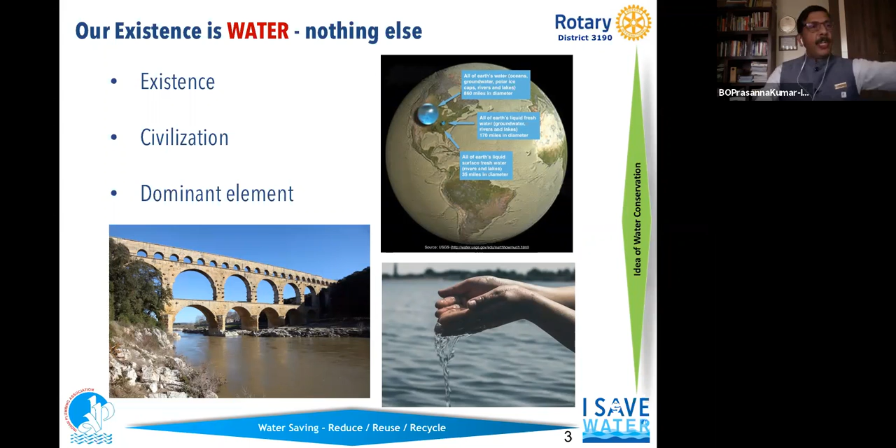This sloka very nicely interprets the purity of water, and we take blessings through water. This means in this water, I invoke the presence of all the divine water from the rivers Ganga, Yamuna, Godavari, Saraswati, Narmada, Sindhu, Kaveri. All these rivers are considered goddesses, and I pray to them to consider me for blessing. This is how we invoke the presence of goddesses through water, proving our existence is only because of water.

So we can say water is everything for us. Thomas Fuller, a great historian, narrated that we never know the worth of water until our well dries. This is the worthiness of water.

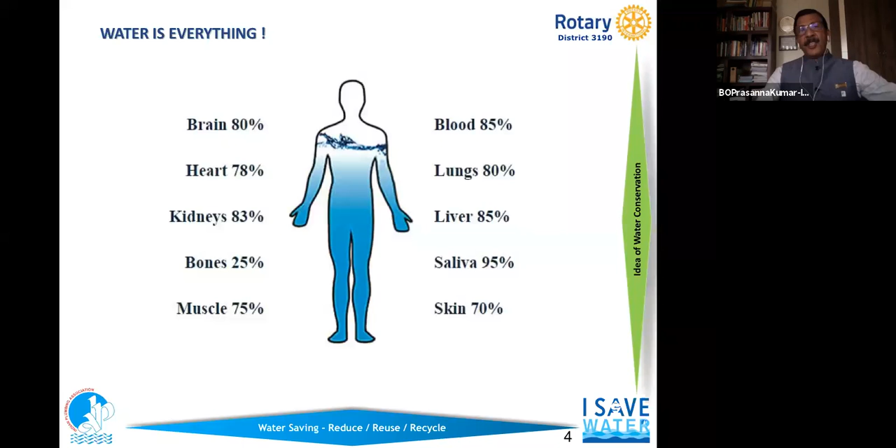If you consider the whole distribution of earth's water, how much of earth has water? As I said, about 70% of the surface of the earth is covered with water, and of that 70%, about 97% is ocean. Except for navigation, it is really of no use for day-to-day human consumption.

3% is the fresh water available on earth, out of which 77% is in the frozen state in our ice caps, and 22% is groundwater. How much of that 22% is left is really a big question mark for us.

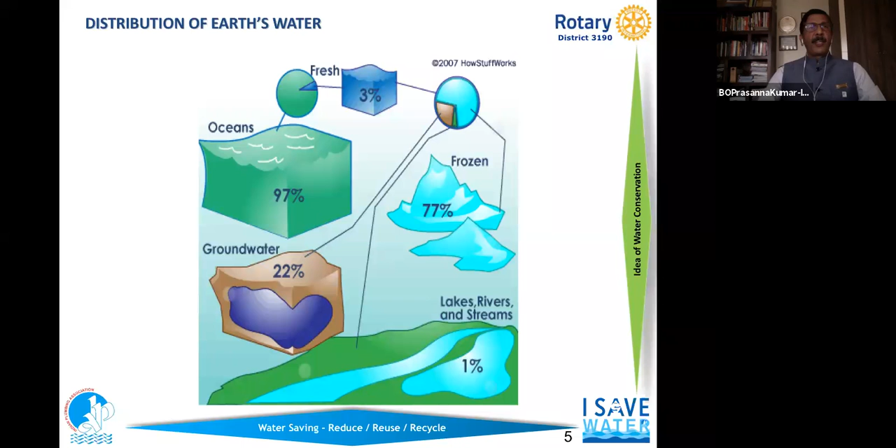Water is also depleting day by day to a very great extent, particularly in the last two decades - there has been a rapid depletion of groundwater. Our usable and replenishable water, in the form of lakes, rivers, and streams, is only to the tune of 1%. So we are all using that 1% of water for our human living.

If you consider that 1%, where are we using it worldwide? If you take the total water utilization worldwide, we use the majority of water for irrigation - that is to the tune of about 70%. Residential use is 10%, termed purely for human habitation.

The rest of the industry uses about 20% of the water. This includes commercial use - hotels, hospitals, commercial buildings, malls, everything - which consists of about 20%.

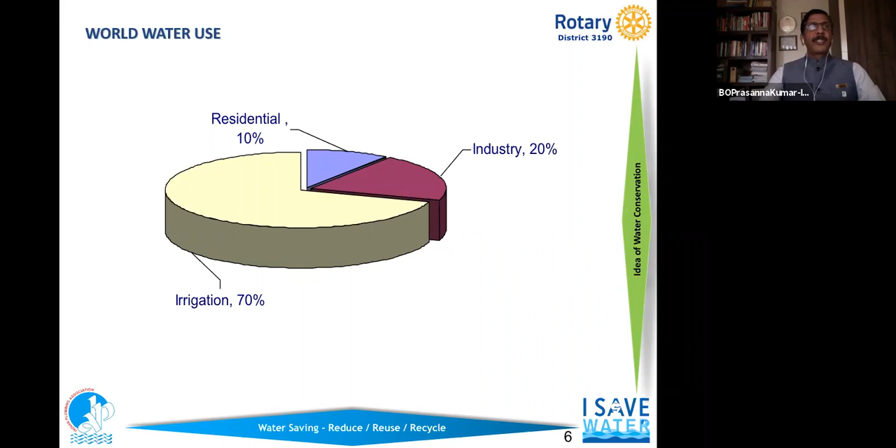So even if we are using only 10% for residential purposes, we are facing utmost scarcity of water in many, many cities now. If you further divide total water usage for residential purposes, for bathing and wash basin alone, about 55 to 60 liters of water is being used.

This is bathing with bucket water, shower or bathtub - on a national average, this is the amount of water being used. On toilet flushing, about 30 to 35 liters of water is used. This is all volume in terms of liter per person per day. Cloth washing per capita is to the tune of 20 to 23 liters. These are all urban water requirements.

Please look at the figures very carefully, because saving is derived out of these numbers. I want to emphasize that saving needs to be derived from these numbers. Washing the house and cleaning activity is to the tune of about 10 to 12 liters. Utensils, about 10 to 15 liters. Cooking is as small as 5 to 6 liters. And for drinking, it is really 3 to 4 liters on average for urban use per person per day.

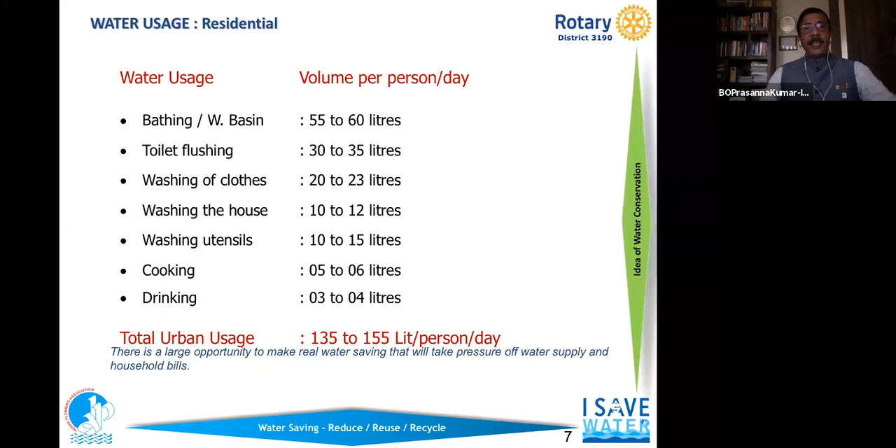Even the National Building Code of India, a referral guide from the Government of India, states that urban cities are using water to the tune of about 135 to 155 liters. Even BWSSB accounts water on per capita requirement or deficit, addressing it in terms of 135 liters per capita, per person per day. So this is the total water requirement for day-to-day activity for residential use.

So if you take that into account, the potable water is only to the extent of about 4% of the total freshwater requirement needed for our drinking and cooking. The rest of the water can be tertiary treated or finely treated water. If I explain the total water requirement, about 8 to 10 liters per capita per head is required for potable water in terms of cooking and drinking. You see the pink segment, about 4%, which is accounted as freshwater.

If you look at the potable water not required for toilet flushing and gardening, shown in the blue-green segment on the right-hand side, it is accounting for about 52%. So there is ample opportunity if we treat the water suitably to use for toilet flushing as well as lawn, we can avoid use of fresh water for these purposes. This is where we need to make a greater effort as a Rotary activity, and along with the Indian Plumbing Association, we need to propagate this cause.

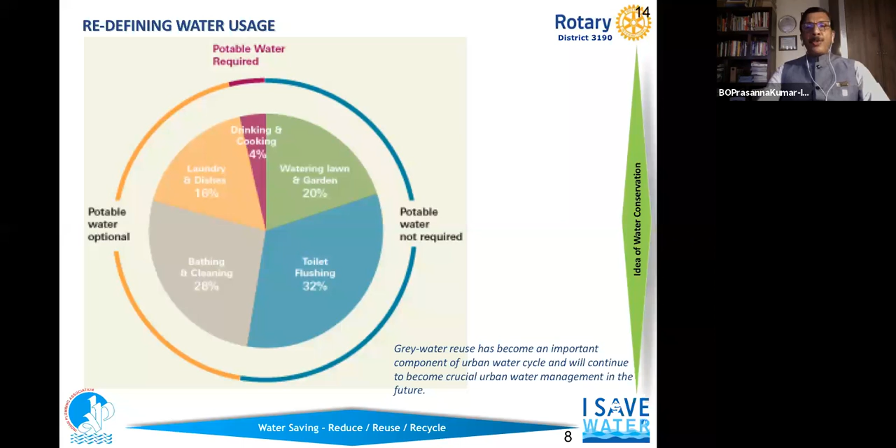So if you look at the areas of consumption reduction, by changing only the habits, how can we change the habits and save water? These are the habit-changing measures for reducing water consumption. This you can say is 9 points, 9 commandments for us to reduce consumption of water, exceptionally for urban utilization and urban life, urban city lifescapes, which really has to follow these 9 commandments.

One is fixing the taps, toilets and appliances - wherever a leak is there, it can be fixed. I'll show you in the next slide what one drop of water leaking means to us, so that you will appreciate how much thought we need to give to fixing leaks, even a single drop of water. Second is to turn off the water when you are brushing your teeth. As surveys show, not only in India but in the majority of countries, both developed and developing, this has become a big nuisance. So turn off the water when you are brushing your teeth.

So this is a simple act which may save more than 1,000 liters of water per month. This is what the study says. So 1,000 liters is, you can say in terms of tanker, 1/5 of a tanker we waste, to that extent of water, if you are keeping the tap open while brushing.

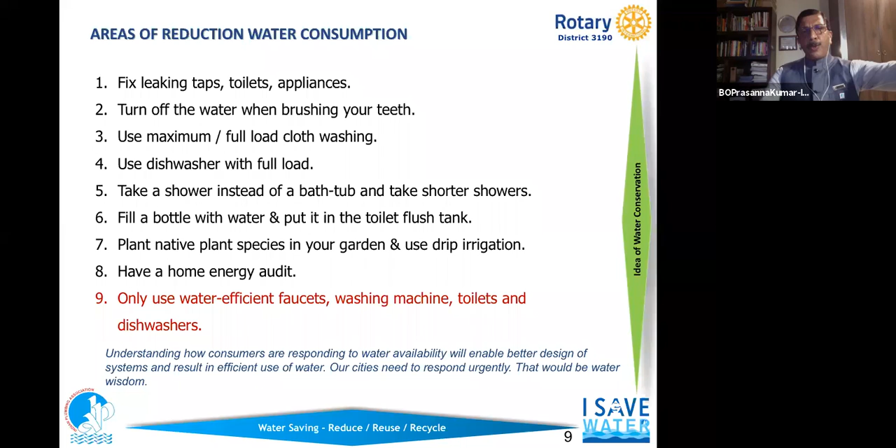The next, the most important one, is use only water-efficient faucets. If you are constructing a new house or renovating, please change all your appliances like faucets from the water-guzzling old type of taps and faucets to new taps, which is a one-time investment. You can equate that investment with a payback period of less than a year. So these are the 9 commandments one has to follow to save the total water requirement.

So I was talking about the drip drop calculation. What is drip drop? Drop by drop, your tap is dripping. One has to know that you are incurring economical loss. Maybe water which you are paying for, which is having a national interest. So we need to save that water.

Even a drop of water, 1 drop of water which is falling from a tap, 1 drop per second, is equivalent to about 21 liters loss of water per day. And per month it is about 630 liters of wastage of water. So annually, your water loss is about 7,000 liters.

It is 1.5 tankers of water, from a single drop of water which you have not corrected in time, which may take about 50 rupees to correct. You are spending water worth about 2,000 rupees annually. This is what 1 drop of water costs.

If you just equate 2 drops per second of water, which may not be a straight line loss accumulation, it may be 43 liters, and annually it may be about 15,700 liters. If you have a 2 drop leakage of water, it costs you about 3 tankers of water annually, which is amounting to about 3,000 rupees in a peak summer. So this is the worth of water. So just remember this drip drop calculation and save water.

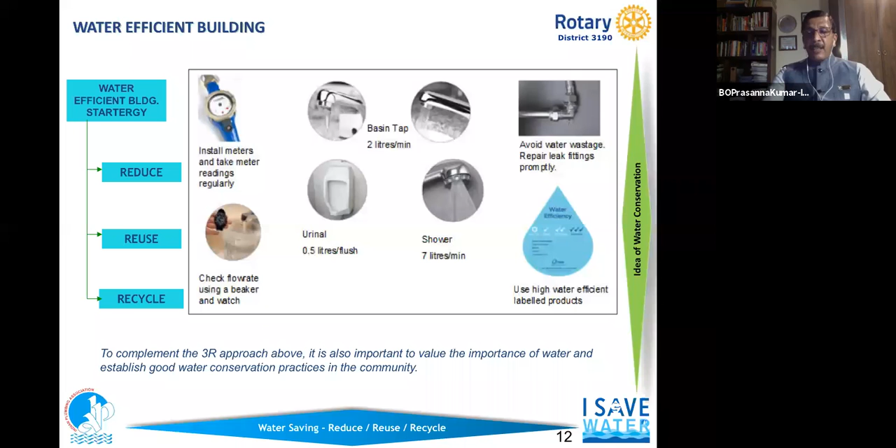Recycling is not our only option, but it is one of the things that everyone can do to help reduce the consumption of water. So recycling is in order to save money. And this approach we just need to keep in mind.

So one of the approaches of water conservation for the home is to adopt water metering. Why is water metering required? As I said, water metering and all that arrangement gives us a total leak detection and leak prevention mechanism. Leaks are the major concern for house owners. Water leakage on the customer's property shows up as excess on the bill. In some cases, it creates significant damage before it gets repaired.

So that's where water metering is required, and leakage can be detected through that water metering, and prevention can be done. The second is the management of excessive water consumption. So smart water meters mean that the household has to pay the bill for what he is using.

In apartments, in situations where individual water meters are not there for a unit, water becomes nobody's baby. You are not measuring the water at your place, and you don't know how to manage the water. So water becomes the more consumptive item because it is not measured.

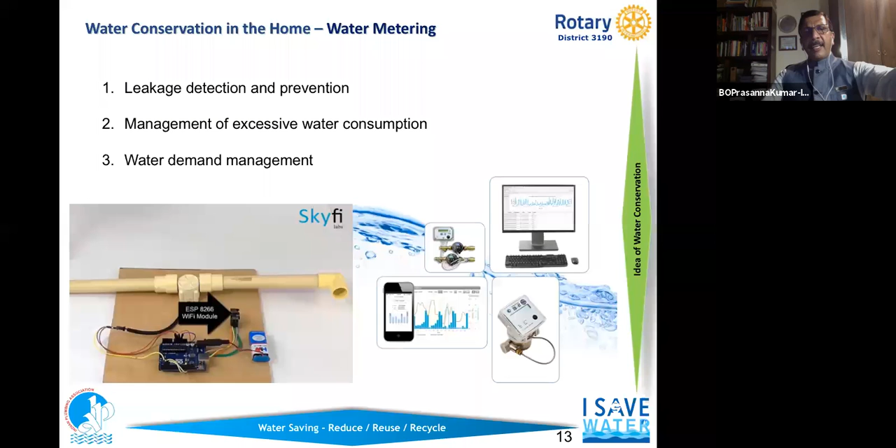So these are a few tips which are required, and a water meter is considered a necessity and the order of the day, and one has to install and measure the different water utilization within the sites.

So next, if you come to water conservation in the home, use of aerators. You can see the small aerators shown in the picture. It saves water and reduces energy consumption also. It reduces splash of water, which otherwise comes with a gush from the tap when you have higher pressure. The water sends a stream outside, and there is a lot of splash.

So the tap aerator is known as a water regulator. The aerator acts as a sieve, separating the single flow of water into multiple tiny streams, which introduces air and water together, so that the water will not splash out of your sink or wash basin, and you will get the same complete, wholesome water effect.

You will not reduce the efficiency of washing using this aerator, and it is a very nice installation. In fact, the Indian Plumbing Association is propagating the use of water aerators. It can be fitted into about 95% of taps, unless it is a very, very old model tap. So saving money by using a water saving aerator is not a big mind game. You just need to replace that.

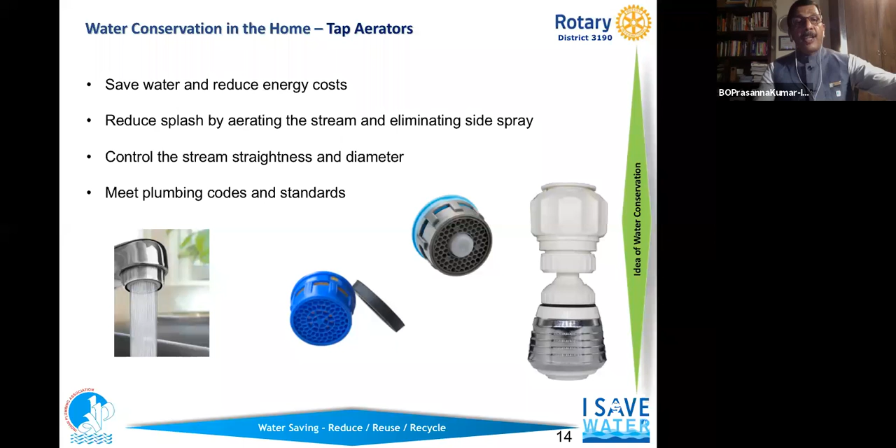You know, these are the things which we are really propagating, which one can immediately consider in their own project, own clubs, and propagate the use of the aerator. Aerator cost is really very, very negligible. Probably it may be 2 cigarettes' cost if anybody is a smoker here. Yeah, so that is the one-time cost which you are doing.

So next is a simpler, just a changing thing: adopting a foot operated tap, which reduces the water consumption. If you have a very diehard habit of keeping the tap open while brushing, this is where you can use these foot operated valves or taps, so that you only press with your foot on the valve when you want to use the water. Otherwise, the water will not go profusely into the sink and go as wastewater.

So these foot operated taps help to maintain hygiene and also avoid contamination amid this COVID situation. So it is also a retrofit arrangement one can consider for reducing the consumption of water.

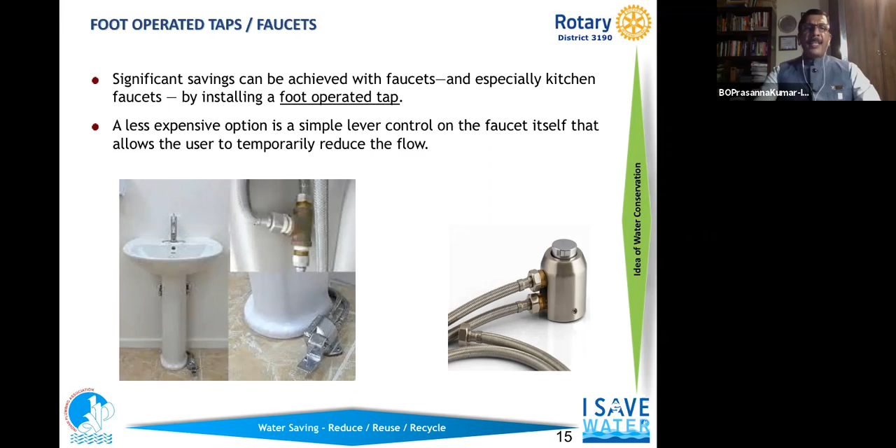So second is, as I highlighted earlier, the use of high efficiency showers. Generally, the olden days showers are water guzzling, as high as about 15 liters per minute of water. If you take a bath for 10 minutes, it is 150 liters of water you will consume for one shower bath. So now the order has come.

We need to use very high efficiency showers. The earlier olden showers were not mixing the air with the passage of water, and were giving a beam of water, and a lot of wastage of water used to happen. Now with the high efficiency shower with aerator, the water usage is coming as low as 6 or 5.7 liters per minute. Once again, the water use for a 10-minute bath is reducing to 50 liters of water.

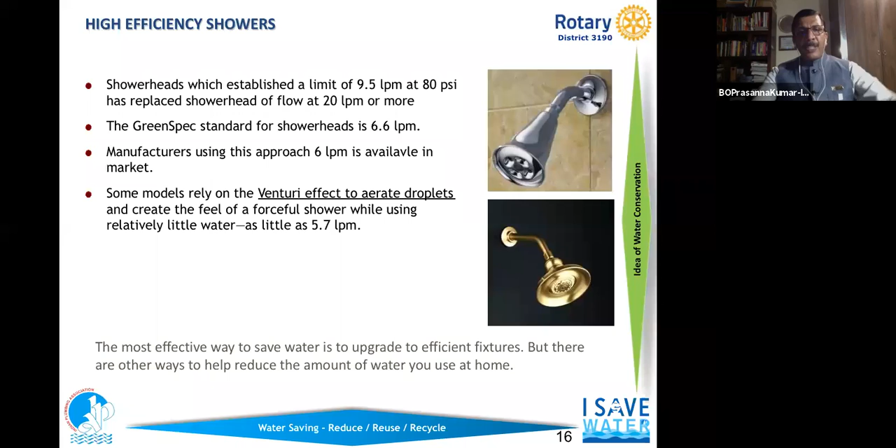If you take a 10 minutes bath, we need to propagate a short bath of 5 minutes, which may reduce still the water requirement from 50 liters per bath to 25 liters. Then you will see this saving. Only we can do it with the help of high efficiency shower heads. So these are the smaller things one has to consider: make the smaller adjustments and change the faucets and fittings to save the water.

The last of this is the use of high efficiency toilets. So already we are using a lot of gravity flush systems for the flushing of WCs, which use dual flush: a low flush for a small use of toilet, and the high flush for flushing the longer waste into the WCs. So that is the dual flush one has to consider.

The flushometer valve is the valve we can call a flush valve. This is also an adjustable flush valve, which uses low flush and high flush and saves enormous water.

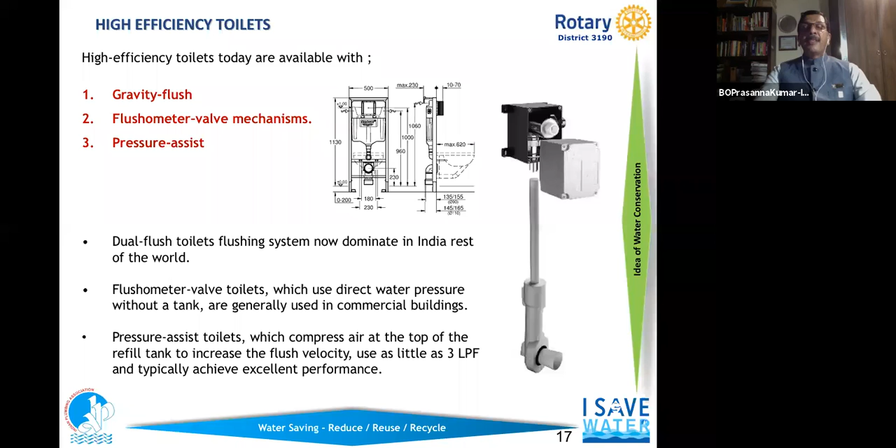The next is, if this water scarcity still continues, we may have to change our toilet flushing system to pressure flushing toilets. It is similar to the toilet flush used in aircraft, which may reduce the total water requirement even to the tune of about 3 liters for the entire flush, but it is assisted with air. Today it may be looking very, very hard to swallow. We may use pressure assisted toilets for day-to-day use. The day may come if you are not saving the water.

So somebody was asking, what is that out of the box thinking in the saving of water? One has to reconsider our thinking. See, anyway, we need to wash our hands after using the WCs or any short washes. Now, because of this COVID pandemic, the washing has increased like anything. Hand washing is given utmost priority with soap water.

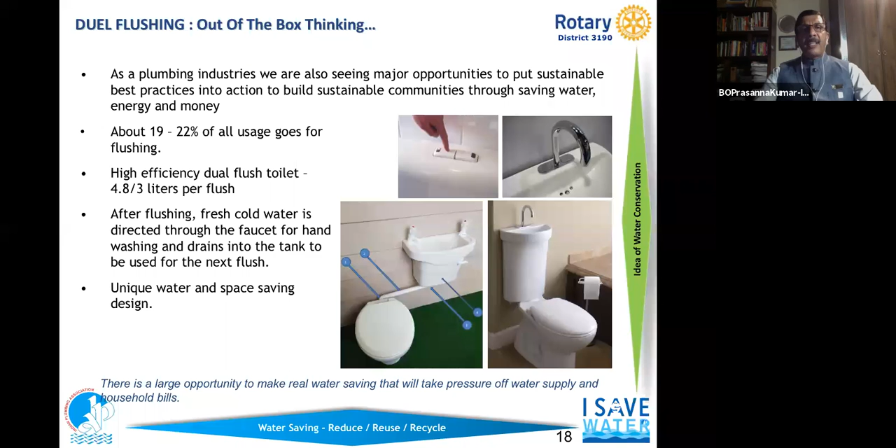So that water, instead of sending it down the drain, one can store in a tank with an appropriate trap so the smell is not coming back to the sink, and the same water can be flushed back into the WCs. There are many manufacturers which have already started manufacturing in India as well. So these considerations, out of the box thinking, we need to make use of in saving the water. So that was the wash basin, out of the box thinking.

Waterless urinals may be the order of the day, because this may not be a residential scenario. It may be the mall, multiplex, offices, where frequent flushing is happening through the urinals. If we use waterless urinals, the saving of water is to the tune of about 70 to 75,000 liters of water per urinal.

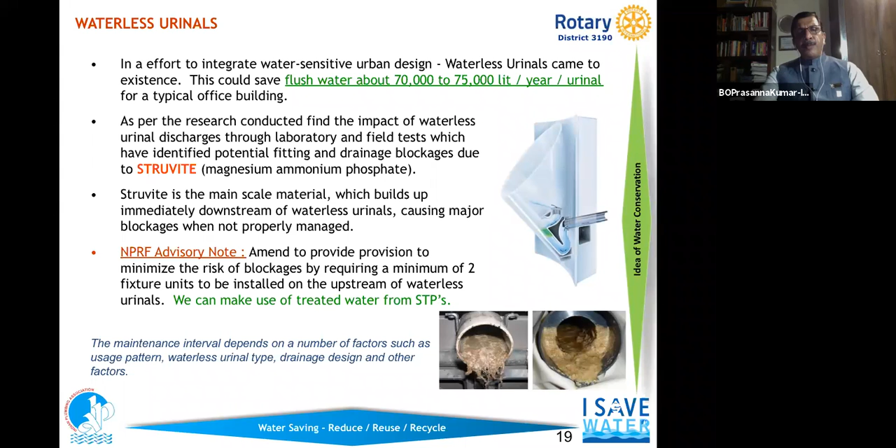This is the amount of water we're going to save. You always imagine trying to see things in terms of how many tankers of water you use. It may be as high as 15 tankers of water which you are spending on one urinal in an office scenario. One has to reconsider the use of waterless urinals. So these are the few things which we may have to consider as saving of water.

So after all that we spend the water, waste is generated, waste is collected. Now it is time to treat the wastewater through sewage treatment plants. For a common man, what exactly is a sewage treatment plant? What is its objective? The principal objective of sewage treatment is generally to keep human and industrial waste, whatever waste is generated, away from human habitation and treat that water, make it innocuous for reusing back into the environment.

Imagine if we are throwing all our untreated sewage into the lakes or water bodies. This is what happens in Bellandur Lake. With waste entering such a water body, the water body will lose its carrying capacity. Eutrophication of lakes takes place. The growth of algae happens. Green unwanted weeds grow there, and carrying capacity reduces. The stinking, and whatnot. Many things can happen if you throw untreated waste into the environment.

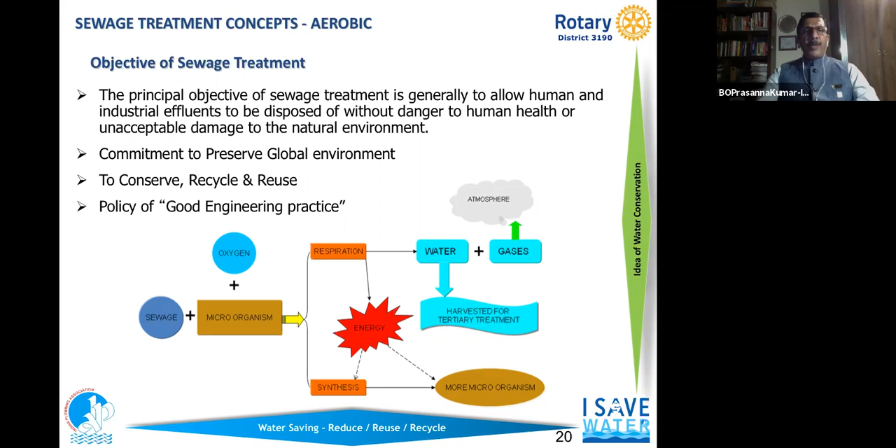So why do we require a treatment plant? It is to protect and preserve the global environment. That is where we need to use a treatment plant, treat the water, and either use it or discharge it into the lakes or water bodies as per the permission taken from the Pollution Control Board from time to time. The treatment plant is also helping us in conserving water, recycling and reusing it back into the system. As I have shown in the earlier slide, we have the potential of treating about 80% of water back into our human consumption. We need not rely on fresh water. And as a good policy, we need to treat the water through the treatment plant.

Generally, the treatment plant has about 4 stages. The primary treatment, where you are removing only the floating debris, the matter which is not biodegradable in nature, screening it through the coarse screen and fine screen and taking it out. The secondary treatment is mixing with air and degrading the organic matter in the sewage; bacterial growth happens, bacteria eat away the biomass, and the sludge is kept separate and the water separate for the tertiary treatment.

Tertiary treatment is the third stage, where you are screening all the sludge and colloidal particles. We reduce the dissolved impurities and make the water usable at this stage for flushing, irrigation, car wash, basement cleaning, and many other purposes which generally may not be touched by humans, because there is a social stigma attached to using treated water. One does not like to touch that water. So we can use it for purposes where you are not touching the water directly.

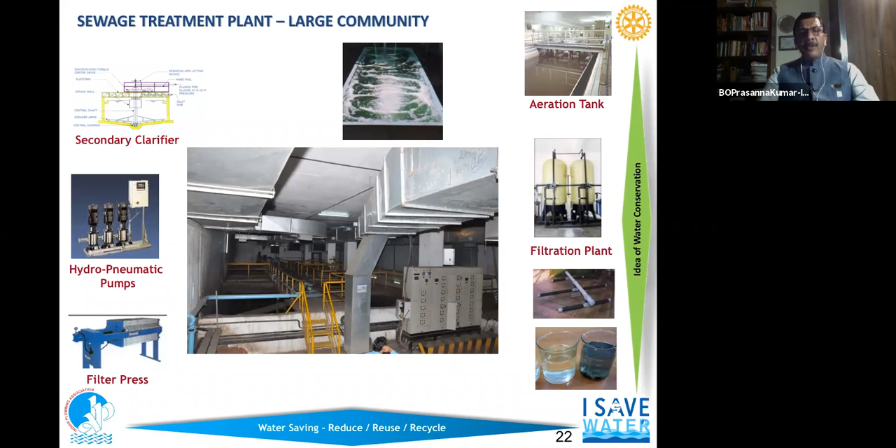So there are many things which are asked. Before that, this is the look and feel of a treatment plant generally installed for larger housing communities, where you have different sections: incoming sewage, the aeration zones, the tertiary cleaning zone, sludge removal zone, and it is all well ventilated, making the complete sewage treatment odorless and taking care of the personnel handling the sewage system. Package sewage treatment plants are also recommended. You can use them as a retrofit or where you don't have space. You can use very compact treatment plants.

In a medium size treatment, from 10 KL to 160 KL, you can use the sewage treatment plant, which is available in package form, like a plug and play system, which can be used in a small apartment complex, small office building, small school, or hospital arrangement, going from 10 kiloliters, that is 10,000 liters, up to 1,60,000 liters. It's a package treatment plant, truck mounted.

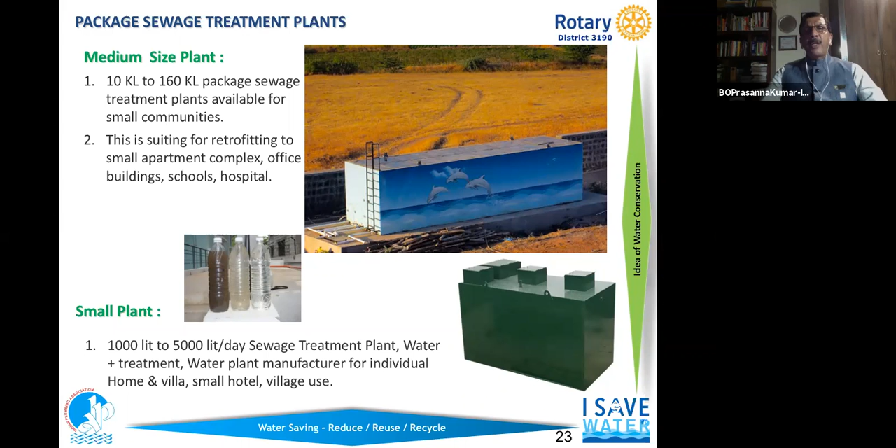Factory fitted and delivered at site. So somebody is asking, what can we do for small villas or a single house where you don't have municipal connection, either for water or for treating wastewater, or for a village house in remote hamlets? One can go for a much smaller treatment system, from about 1,000 liters to 5,000 liters, that is 1 KL to 5 KL treatment plant, so you can treat and reuse that water, replacing the fresh water otherwise required for day-to-day consumption.

Then the question comes, at what point do we need to stop our treatment? The sewage treatment standards are well defined by individual state pollution control boards, and also by the Ministry of Environment, Forest and Climate Change, Government of India, which define up to what level the polluting parameters should be. For example, any sewage is defined in terms of biological oxygen demand, chemical oxygen demand, and the suspended solids present in the sewage or treated water, or the amount of nitrogen and phosphorus available.

Why does algal bloom happen when you leave sewage treated water into a lake? Because nitrogen and phosphorus are nutrients for plant growth, we can say NPK, as we call it in fertilizer terms. This is what is available in sewage, which also comes into the treated wastewater, but we need to limit those nutrients before using it for different purposes. This is what the sewage treatment plant does for you. These are the standards defined time to time by the government, and we need to adhere to them.